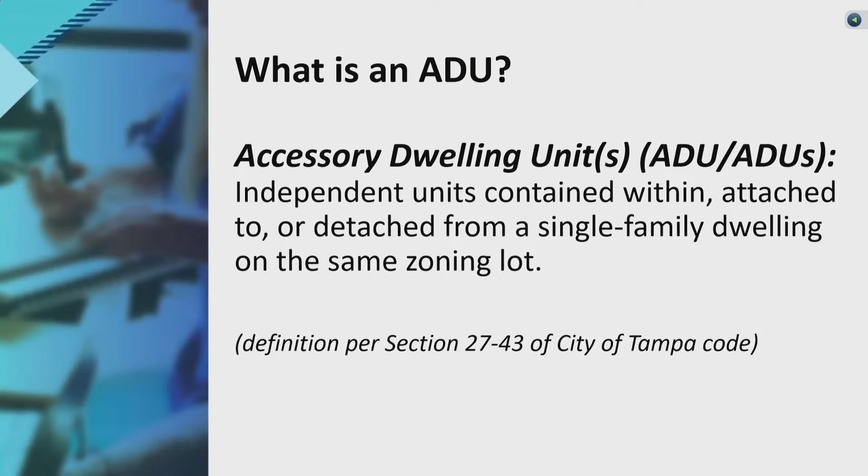So just a couple of definitions to get everyone on the same page. Definition of ADU - this is from the City of Tampa Code - it's independent units contained within, attached to, or detached from a single-family dwelling on the same zoning lot. Other definitions that may be pertinent to the discussion.

Extended family residence - I think you guys deal with this on a somewhat regular basis. So extended family residence, within a single family residence, is a living area designed to provide independence and privacy by allowing a separate bedroom, bathroom, dining area, and kitchen for an extended family member. There's a bunch of nuances within these categories, which I'll try to get into without making it too confusing.

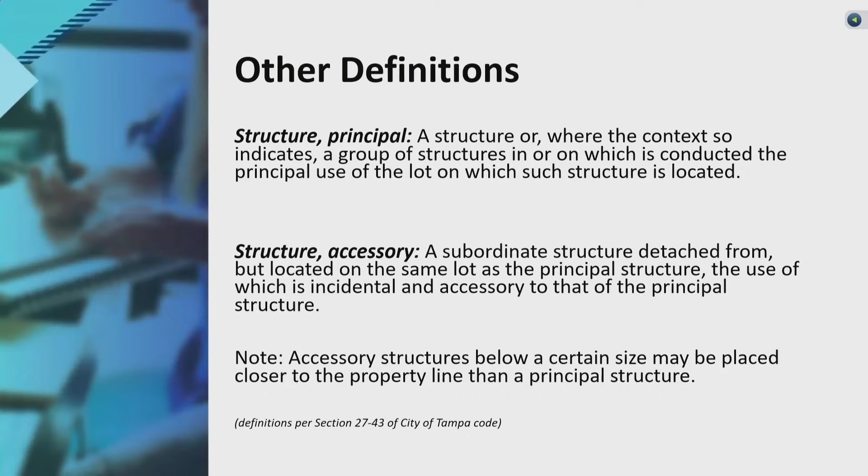As a quick timeline on ADUs, it's been a multi-year effort we've been working on throughout the city. The last big push started late last year and continued into this year, where we're basically doubling the area of the city where ADUs are allowed.

So we went through a long public outreach effort. We had 8 to 10 community meetings, and we went to the communities that expressed high interest in ADUs, so those are the areas we targeted.

The AARP actually has a really good packet on ADUs, and we have some in our planning office. If you guys want these, I can get them to you. It's just about the benefits of ADUs.

Now let's get into the overarching policies that guide ADUs. This is from the comp plan, land use policy 9.5.6. It encourages accessory dwelling units, stating they shall be permitted in future land use categories that allow residential development, subject to regulations designed to limit impacts and protect character.

So we get a lot of questions about what is and isn't an ADU. By right now, you could build a bonus room, a man cave, a she shed, whatever you want to call it, that has a separate bedroom and a separate bathroom with a toilet and shower. You could have a fancy wet bar with cabinets, a dishwasher, and a fridge. The only thing you can't have is a cooking appliance.

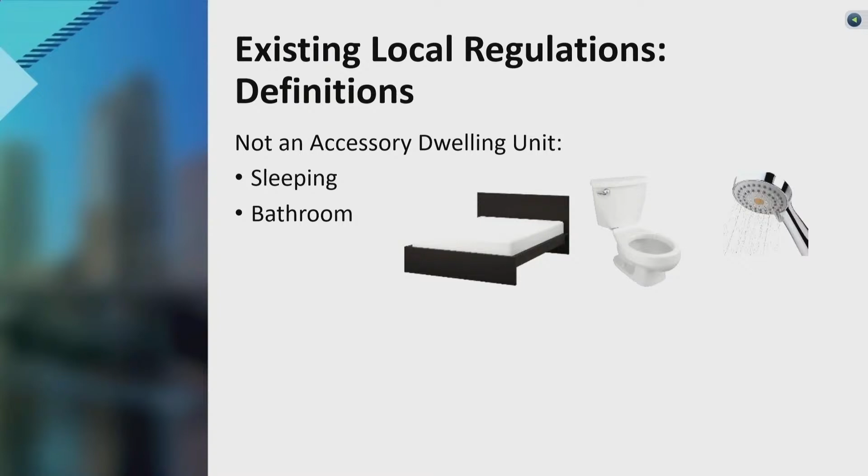This is what flips just a bonus room into an accessory dwelling unit: the introduction of a microwave, or something as simple as a hot plate, oven, or stove. That's how the city differentiates between just a room or extra living area versus a whole separate ADU, which may or may not be allowed depending where you are in the city.

We'll get into that, it may come back up here in a bit, but I'll continue with the rest of the presentation. So here are some different forms an ADU could take, going from left to right: conversion of a basement or garage, conversion of an existing structure. We have a lot of those in Seminole Heights and some of the older neighborhoods, people wanting to convert an old garage that's been there for 50 years into living space. They could also be a new ADU, detached or attached.

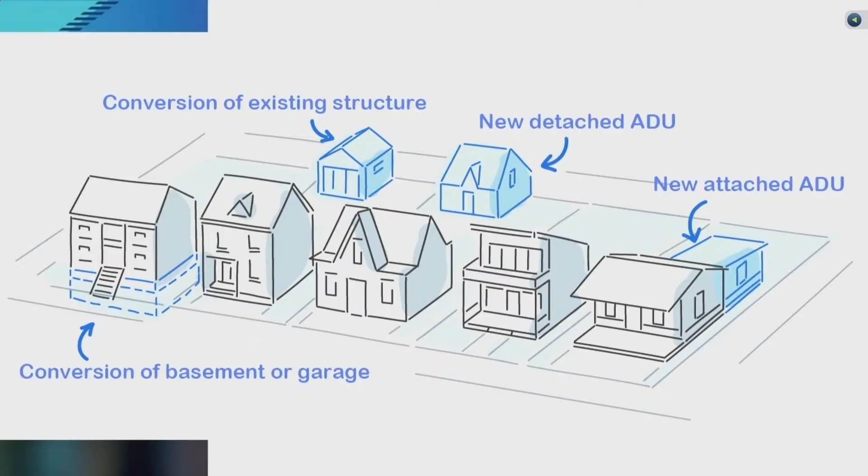So here are just some images, not necessarily from Tampa, but showing that form. Some of them are detached, some are above the garage.

Now we'll get into the regulations. This map is the important thing here. The area in red is the area, if council approves this Thursday at the first hearing, where ADUs would be expanded to the whole area allowed in red. So it's basically doubling the area throughout the city where ADUs are allowed. It's going to cover about 21% of the city land area.

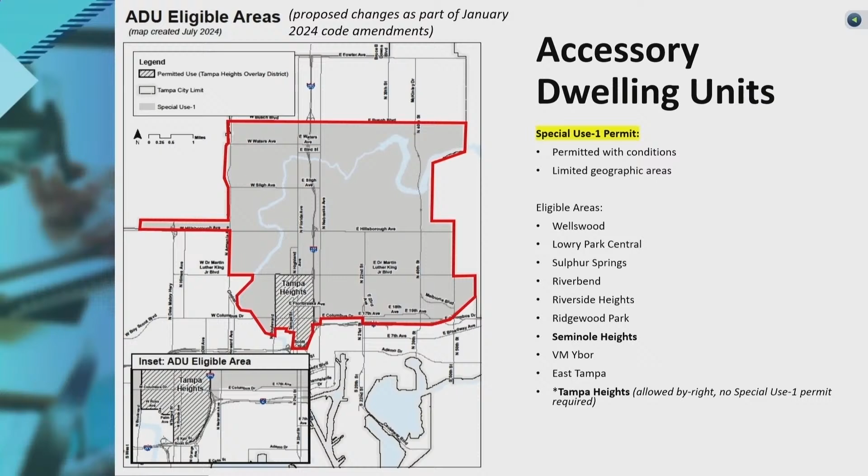It's roughly half. I don't have the before, but it's essentially the Seminole Heights area and East Tampa, and then we're expanding it a little bit out. So this Thursday is the first hearing, and the second hearing should be July or August, in which case this should become effective in this area.

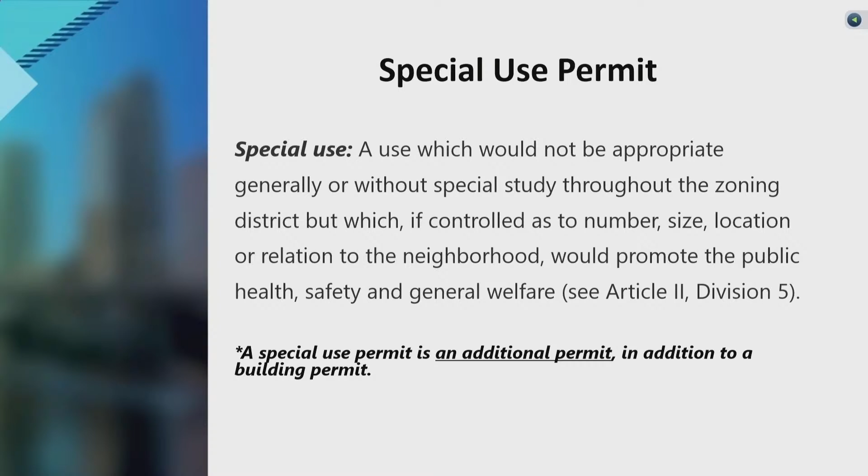The thing is, with ADUs, they require special use permits, which is an additional permit on top of a building permit. Well, let me just get into it here.

So these are the current regulations for ADUs. When someone wants an ADU, they have to apply to the zoning office for a special use permit, and these are the criteria staff uses to judge whether they could approve it. The max area is 950 square feet, and the main residence has to be owner-occupied, so right now the owner has to live in the main house. They cannot live in the ADU.

An accessory dwelling unit may not be located in a non-conforming accessory structure, or one made conforming as a result of a variance. We get a lot of those cases in Seminole Heights, people wanting to convert a non-conforming garage. Staff cannot approve it, so those cases usually get kicked to city council, and only city council right now could overturn staff's denial. Also, at no time may the number of occupants exceed two.

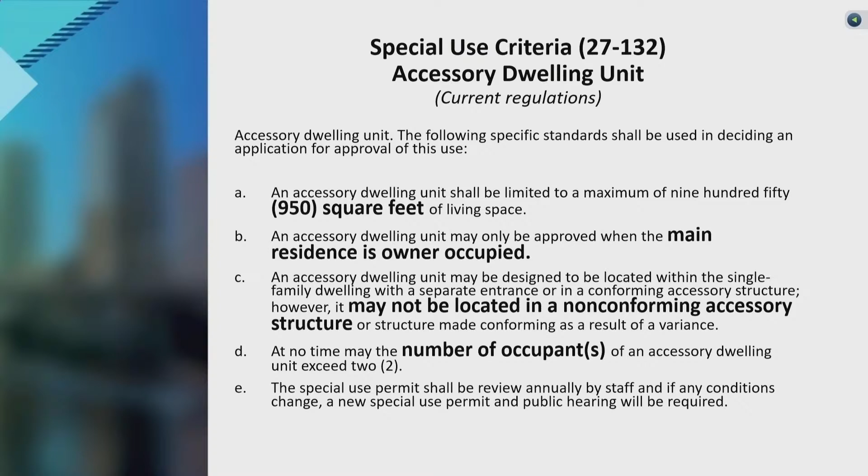These are the changes that are going to be part of this January 2024 cycle, which the first hearing will be on Thursday. We are changing the special use criteria.

If you look at letter B, we're going to propose that the main owner has to reside on the property. So they could live in the ADU and rent out the main house. We're getting a lot of those requests, someone that's downsizing, they don't need the whole house, they want to live in the ADU and travel half the year. Right now that's not allowed.

These changes would make that allowable. Also, we're going to give staff the authority to approve an ADU in a non-conforming structure, so they don't have to deny it. Someone could apply for a variance, and staff could approve it.

And then we're also allowing the number of unrelated occupants. So at no time—we're taking the total occupancy of 2 to saying no more than 2 unrelated. That allows for the third person. If there's a young couple and they have a small child, now they could legally stay in that ADU.

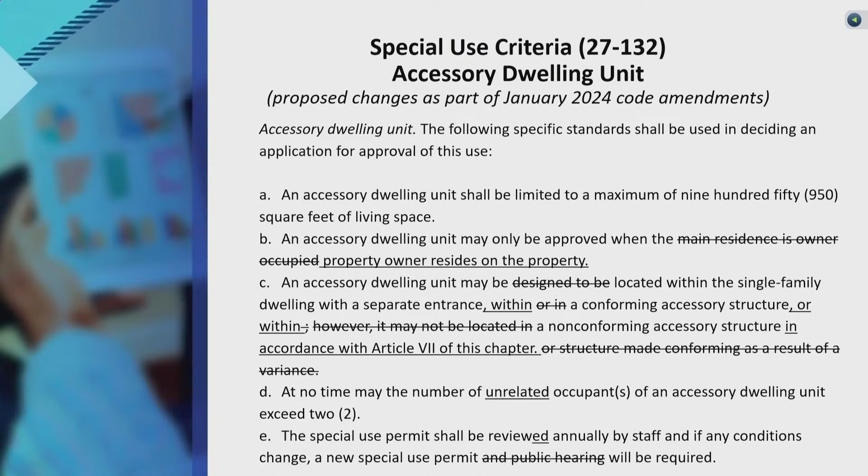Extended family residences are allowed citywide. They're essentially ADUs, allowed citywide, but there's some other restrictions. People that could live in there have to be part of the extended family, either by marriage, blood, adoption, or legal guardianship. So you can't rent to strangers or friends, it has to be for a family member.

And the other strange thing is that the occupant of the extended family residence may not pay rent. That's the way it is now. If you have your mother-in-law back there, you can't charge her rent.

All right, so the current dimensional regulations—this is from city code, generally applies citywide. Each area, Seminole Heights and Tampa Heights, is a little different. Even East Tampa, the setbacks are a little different. I'm not going to get into all that because it's going to get way too confusing, but that's a result of the code kind of being piecemealed over the years. We wanted to do an overarching citywide amendment, but that didn't go over so well, so we're doing it piecemeal, and as a result each neighborhood has its own kind of standard. But the general code generally applies through most of that ADU area.

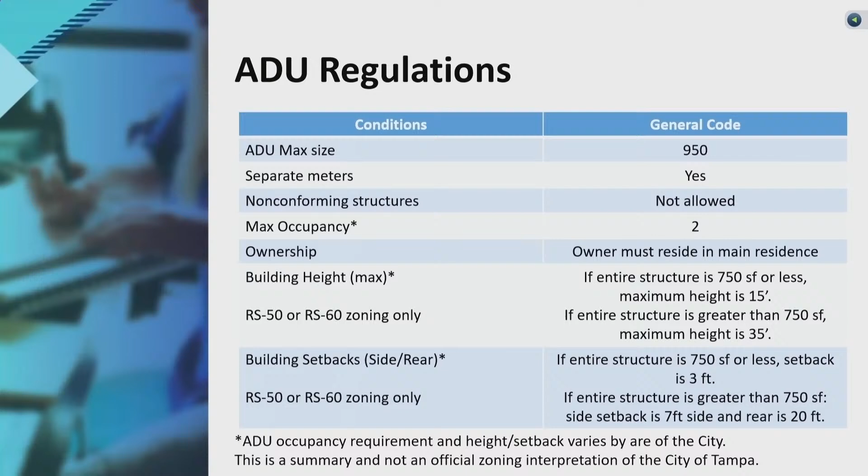I won't get into all the setbacks, I'll try to get through it here. As far as parking goes, right now it's one parking space per ADU, that's in the general code. Again, it's different in Tampa Heights—they have a little bit more, some parking relaxations, but I won't get into that. I could, if you guys have specific questions, I can get you those answers later.

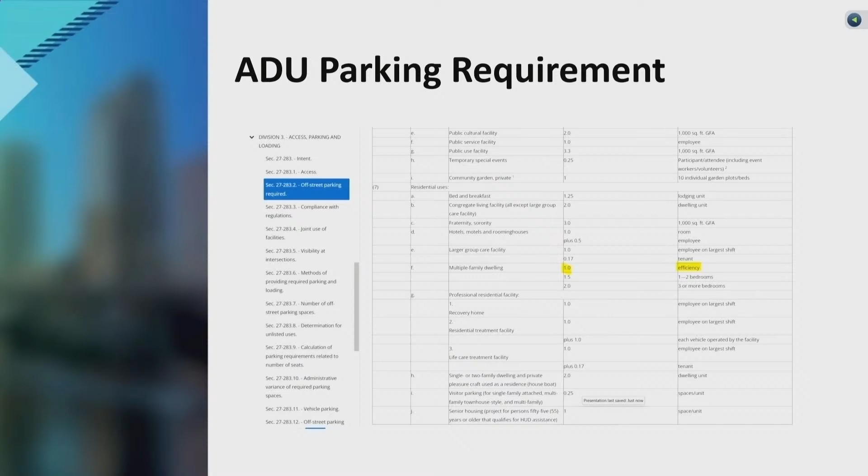Yeah, the key word there is that you know of and that have been permitted. Yes, of course. And that's kind of one of the drives of us trying to allow more ADUs, because every time we go out we hear, my neighbor's building this, converting their shed in their backyard. It happens. There are ways to address that, but I think it's also incumbent on us as planners to see what people are doing and then find a legal way to do it the right way, make sure the structures comply with building code, and that it's safe.

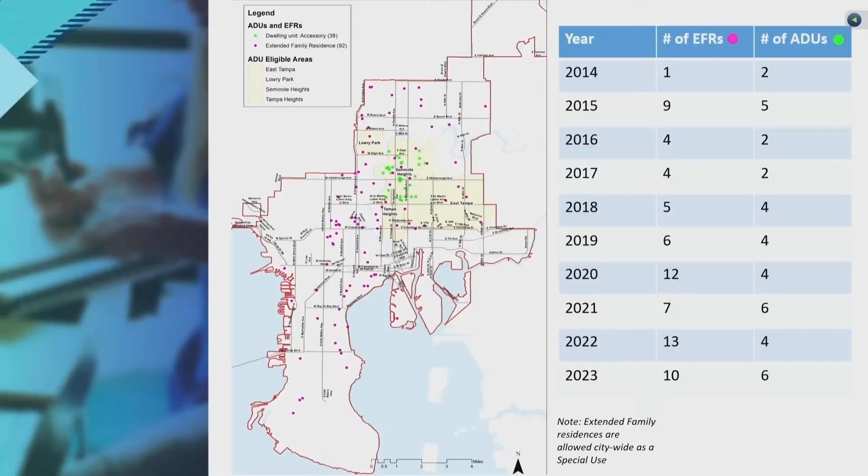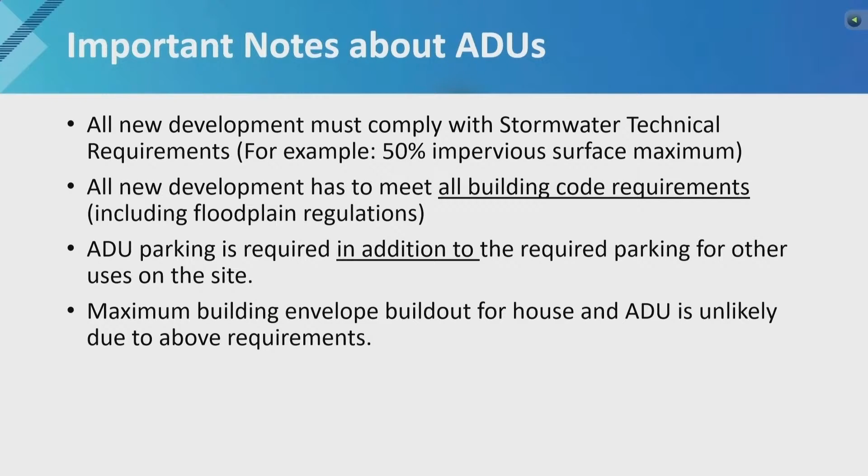All right, do you guys have any specific questions or comments?

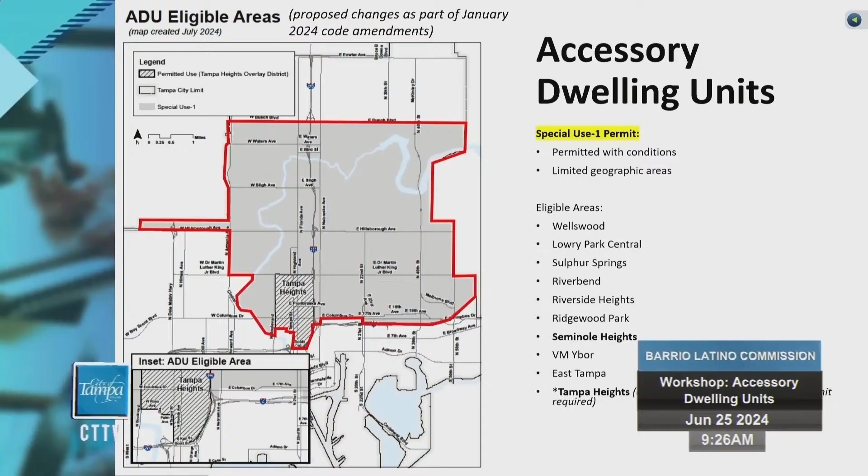Are you actually continuing to move through the different neighborhoods that this is impacting and bringing this forward to the citizens of each of those new expanded areas? Yeah, so if you look at the area in red on the screen, these were the neighborhoods that, when we did a citywide survey - a simple, do you support ADUs in your neighborhood, yes or no - we went to the neighborhoods that had 70% support or higher, and at least 70 responses, because we want to go to areas that were actually engaged with the survey and showed high support. There were some neighborhoods with a lot of engagement and a lot of no's, so we didn't go to those neighborhoods at this time. There was actually a lot of support within Ybor itself, but we didn't include it - it was getting too complicated with the historic district, trying to include that area as part of this code cycle. So we know there is support.

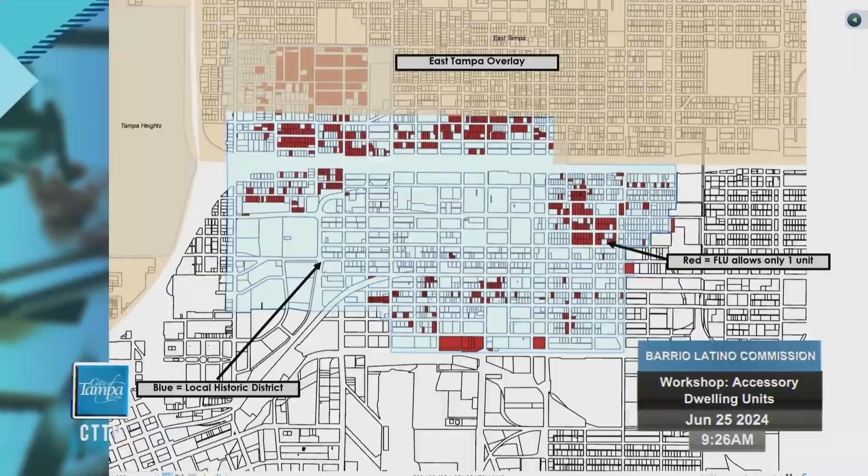The big thing is in Ybor, I just want to point this out - I don't know if it's in here. This was just a map I was using to clarify my thoughts, but I'll try to walk you through it. The light blue is the local historic district. Right now, YC zoning allows for a second, third, fourth unit - it's essentially multifamily zoning, so by right, most lots could accommodate a second unit. The red lots you see do not meet the minimum size requirements for a second unit, so it's not that many. That's why, if it meets the guidelines and you approve a second unit, that's kind of a de facto second unit or ADU that people can have. But we would still be interested if the board or neighborhood wants to explore ADUs in addition to what they already have.

I just want to clarify what you just stated. In viewing Ybor City specifically, since this is our purview, ADUs are not necessarily the term that we might hear. We might hear just an additional unit because by rights they have that. And they do not require a special use permit of any sort for that. That's correct, yep. Okay, thank you.

Yeah, and that's why it's kind of like if you made that an ADU, then you're kind of adding another process. But again, if it's something that the neighborhood would be interested in, we could certainly do that.

I know you might not have the answer to this one, but the parking. I know some houses that might not have parking, they have street parking. So if there's a house and they qualify for the ADU, are we gonna make them put in, or justify or figure out how they can get one more parking?

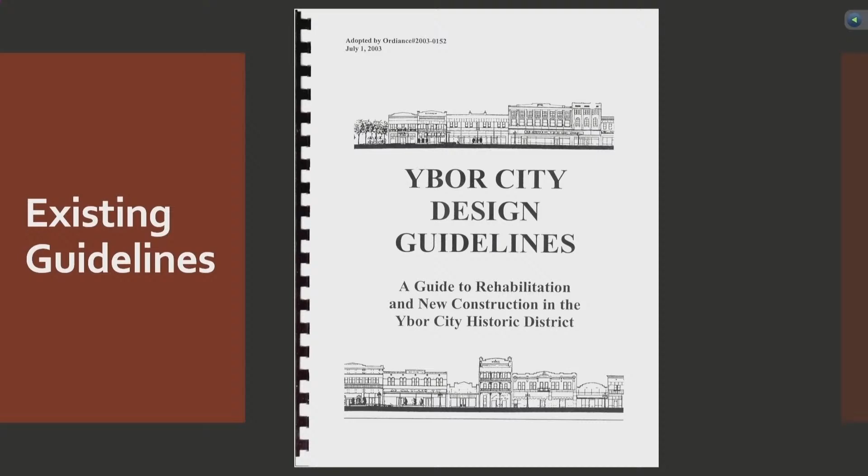And we've been working hard to create a set of modernized standards that'll be codified and adopted to assist owners and developers in meeting their project goals in a historically sensitive way. Provide specific measurements of success, address modern topics, be reformatted and better organized, conform to ADA fonts for equal accessibility, promote maintenance and encourage rehabilitation over new construction, and overall create a user-friendly document.

Our current preservation guidelines have been an effective and helpful broad how-to. However, we do use these as a review tool when evaluating projects going before the BLC, which can be challenging when categories are overly broad. A previous staff assessment of the existing guidelines found that there needs to be more emphasis on rehabilitation.

The code lacks the necessary references to the Secretary of Interior's standards, which are codified in our code as a review tool. The new construction section lacks depth. The overall document is not formatted in a method that is informative and instructional. And some illustrations lack details required to be of assistance and tend to be extreme as a comparison method. The advances in technology necessitate periodic updating—again, it's been over 20 years. And we've also added additional sections to address certain elements.

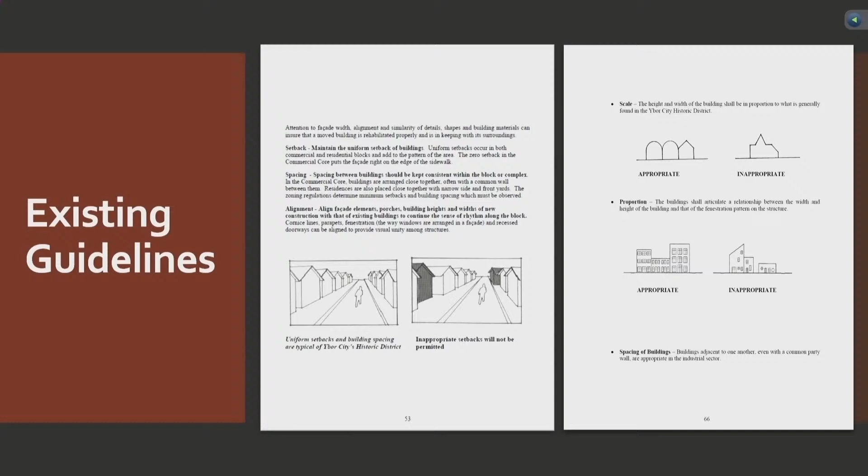So beyond just listening to you guys and your discussion, we've also had several other sources and inspiration, including the existing design guidelines. The Secretary of Interior standards is a big one. They were updated, I believe, in 2017. The preservation briefs, which are continuously put out by the National Park Service, and other cities' design guidelines.

And the state of Florida's model guidelines for design review. That's a very helpful tool. They actually have illustrations in there that different cities can use, so there's consistency across the city governments in Florida. And we're going to add some information about flood adaptation, which is an important subject here in Tampa, as well as all of Florida.

Here are some iterations, beginning with the existing standards to a preliminary draft where we engaged with the consultant a few years back, and then the current staff draft. So you can see where we're headed with this. We're trying to have a much cleaner and friendlier format that we use.

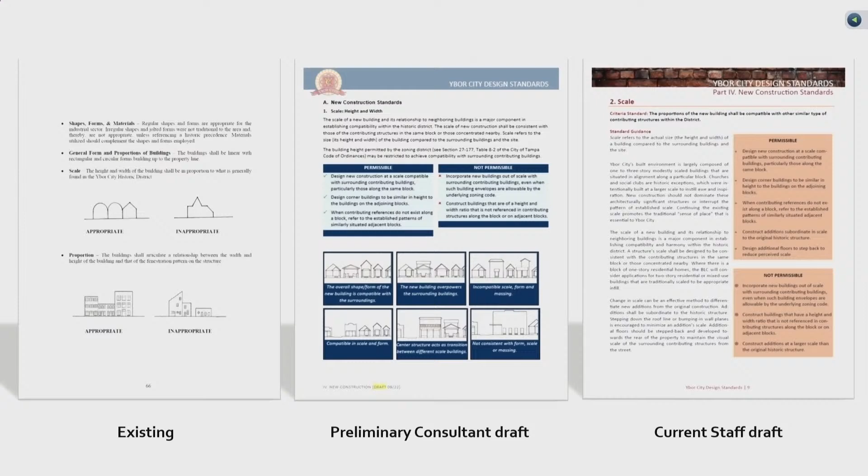The proposed draft components, we're trying to have a one-page sheet for each criteria, so it'll be helpful in pre-application meetings that we don't have to give them maybe a 100-page document, maybe just the certain sheets that pertain to their project. So each one will have the criteria labeled, the standard, which will have the word 'shall' in it, so it conveys its importance. That is the important sentence that we're going to be judging each project by, or how we're going to evaluate the project. Does it meet the standard for each of these criteria?

Any key terms that need to be addressed, some context, whether it's some historical background or why that criteria is important for the board to consider, the basic guidelines, and then having a summary of clear, permissible, and not permissible details for each project to be evaluated by.

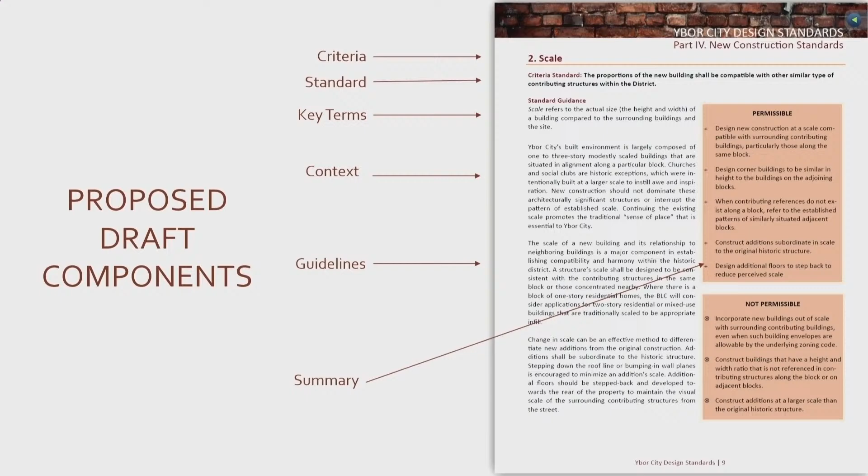And the back sheet's going to have some visual examples, whether we use diagrams, some photos, and I've even been playing with AI generator, so some of our images come from AI. Those are typically the non-permissible ones, because we don't want to shame anybody and use their property, so I'm using AI for the non-permissible.

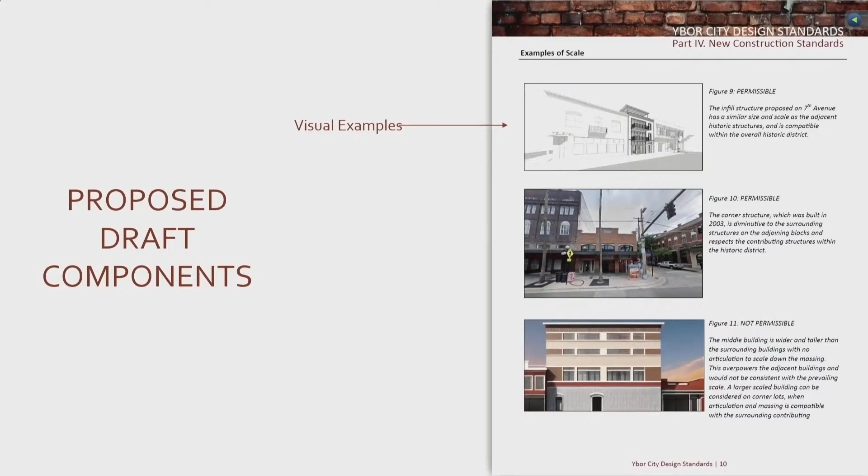Here are the basic 6 sections. Section 1 is going to be your standard introduction and general information that's just being updated. It's going to include the YC8 and YC9 zoning districts, which are not currently in the 2003 guidelines.

Section 2 is new, it's maintenance. Right now, maintenance and rehabilitation are one section. We're breaking maintenance off. We want people to be able to use these guidelines to maintain their home. That should be the first defense, and preservation is maintenance. So that's going to be a new section. I'm using some of those flood adaptations and some of the other preservation briefs that address basic home maintenance for the typical owner.

Rehabilitation, one of the most important chapters. I'm working on that one right now. We're going to be using some of the positive examples that have come before this board of successful rehabilitation projects, and we're going to be reforming that into the new format.

We've tackled new construction first. That is something you all see quite often, so we thought this is going to be one of the sections we needed to beef up the most. I think it is only 4 pages in the current draft, or in the existing standards. And right now, we've got it up to 57 pages. So really beefing up the new construction section.

The main thing that we want to emphasize is compatibility when it comes to new construction. All of our standards under the new construction section are going to tie back to, is it compatible with the district?

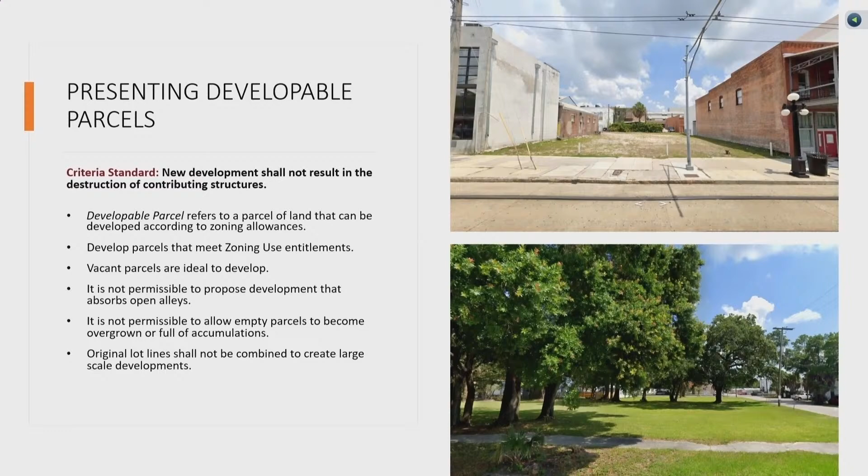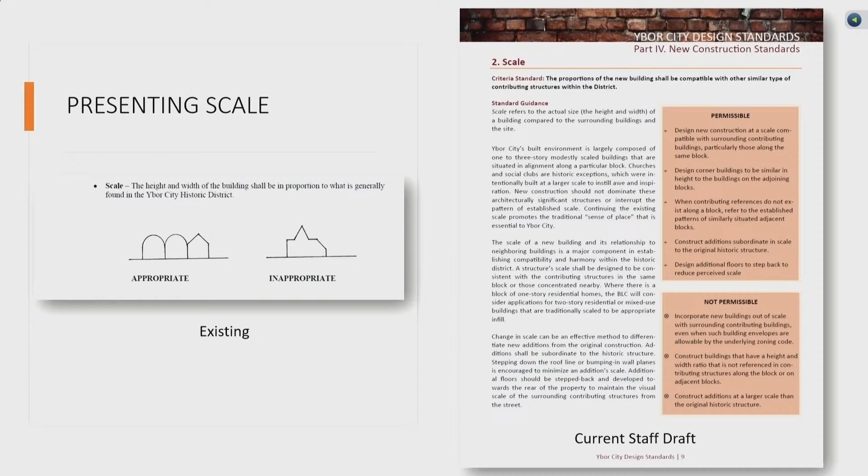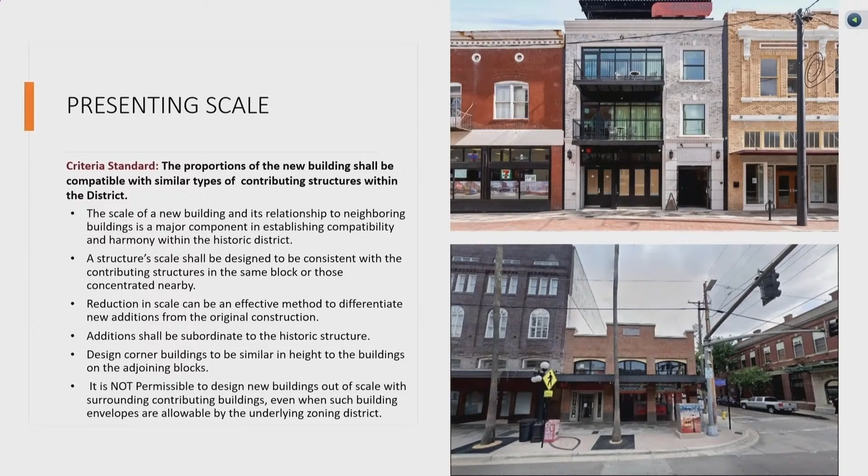Here's how scale is currently presented, and here is our current staff draft of what that page would look like. Scale is one of the most important criteria we considered in new construction. The scale of a new building and its relationship to the neighboring building is a major component in establishing compatibility and harmony within the district. So we really wanted that emphasized, especially in that standard.

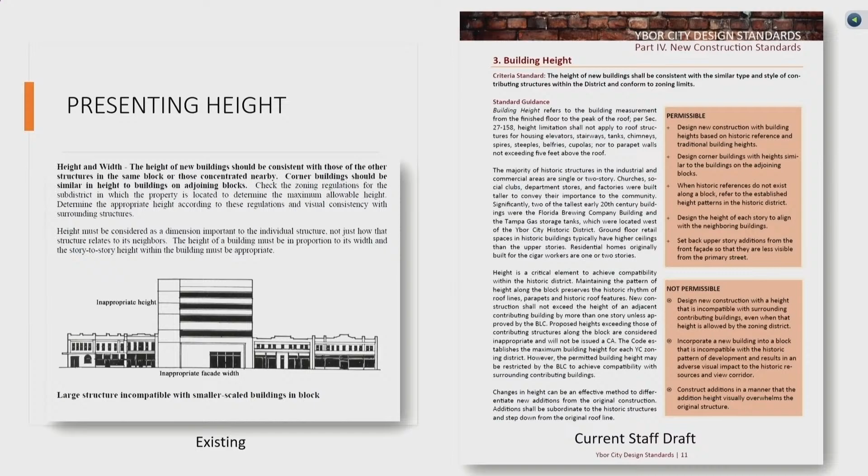Presenting height. Height is another important component when considering compatibility. Here's how it's currently presented and our draft. As with scale, height is one of the most important factors.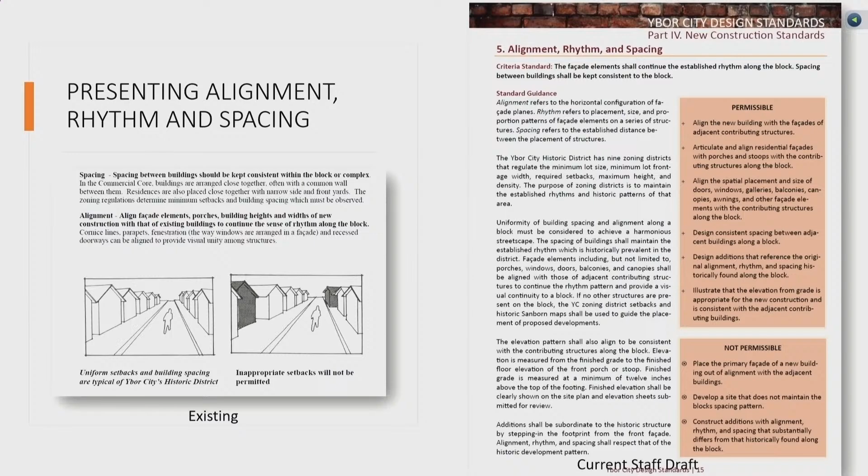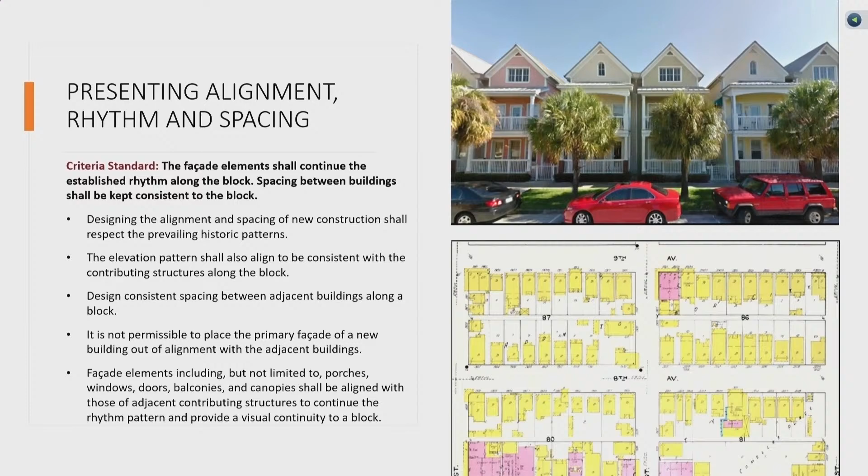Here's how building materials is addressed in the 2 iterations. Building materials for new construction is an important topic. We acknowledge that advances in material manufacturing continuously produce new building options. The BLC reviews substitute materials on individual cases to determine if the standards are met. Overall, any materials proposed shall be similar in design and appearance to historic materials found in the district. Vinyl and faux replicated materials are not permissible.

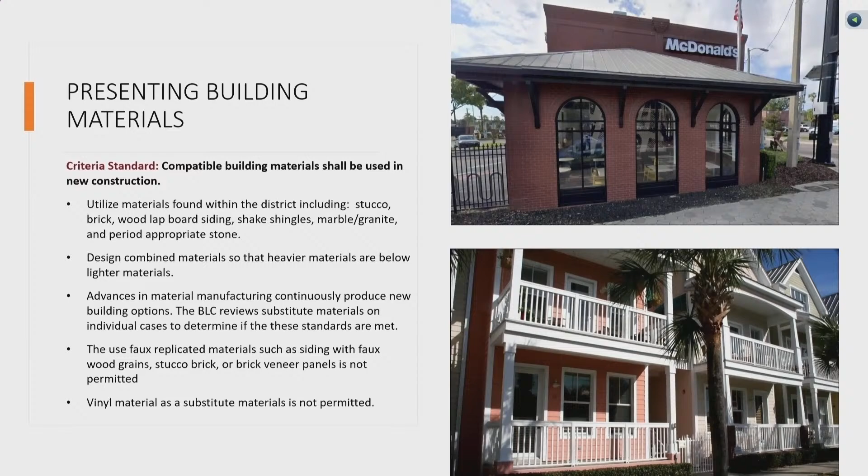Fenestration is always important in historic preservation, and the doors and windows shall be historically referenced and share the same insets, materials, proportions, and details as historic windows in the districts. Windows shall be appropriately trimmed with casings and sills. Doors with side lights and transom shall have the similar mullion treatments as the door.

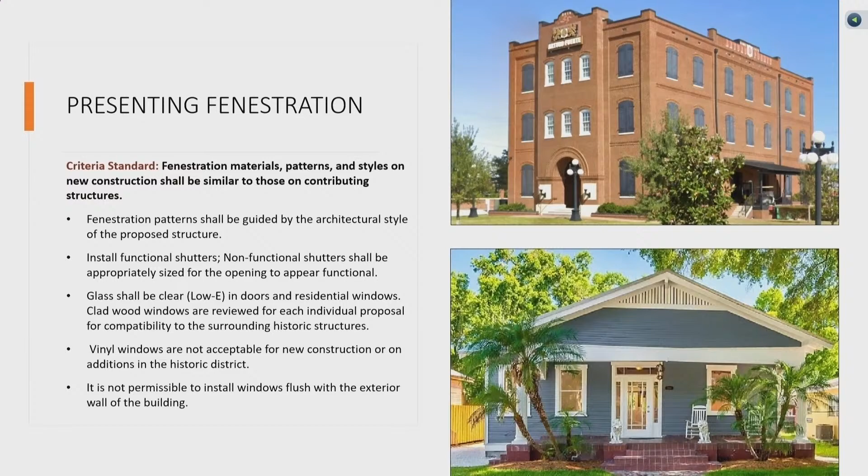Murals, another new subject that we're addressing in our new construction and in the general standards. There'll be 2 sections on murals. This is specific to new construction because new construction has a unique opportunity to address murals during planning.

And occupied roof structures. This is another common project proposal you all are seeing where they want to add rooftop additions to historic structures. So we're addressing that. Mainly it needs to be compatible with materials and buildings in the district.

And we've added some very specific numbers in here, and that will be in the guidelines when we send it to you. We'd like you to look over those numbers to see how you feel about how much roof percentage they should be able to occupy and how far back it needs to be depending on the height of the structure.

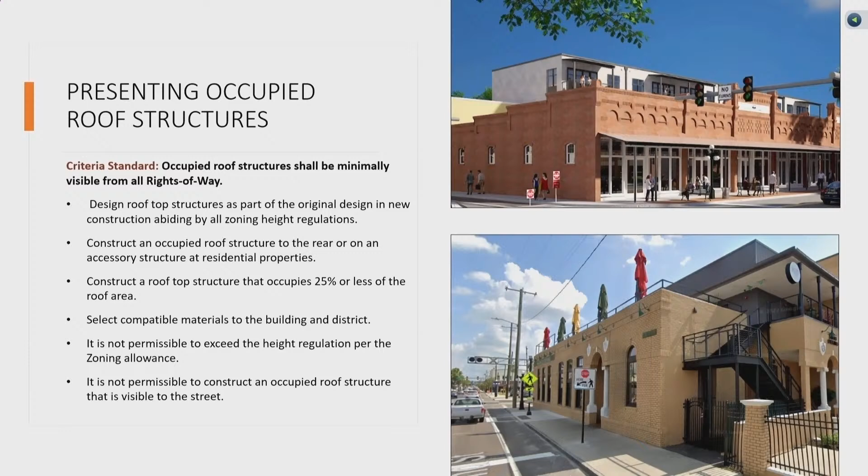And modern technology, this is something that probably needs to be continuously updated, such as solar panels, AC, HVAC units, mainly having it shielded, especially during new construction. That's something that should be addressed on all of the plans coming before you. How are these items being shielded and not affecting the historic character of the district?

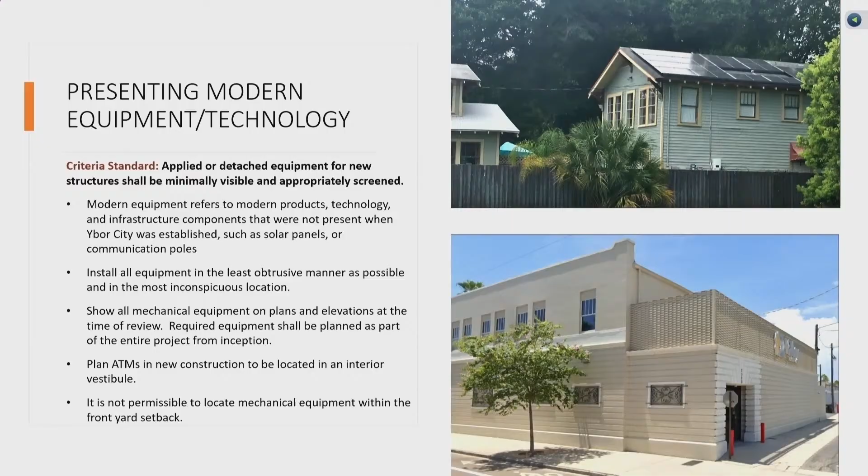As I mentioned, the importance of the standards, we're having very specific standards for each of the criteria. This is what staff will be using moving forward when we adopt these standards, to make sure that when we evaluate them, does the standard meet the criteria? So that's going to be the beef of these new updated standards that we really want you all to reflect on and perhaps give us your notes, if you have any, to make sure that we're conveying what should be evaluated.

Overall, new construction needs to be compatible, appropriate, and referenced.

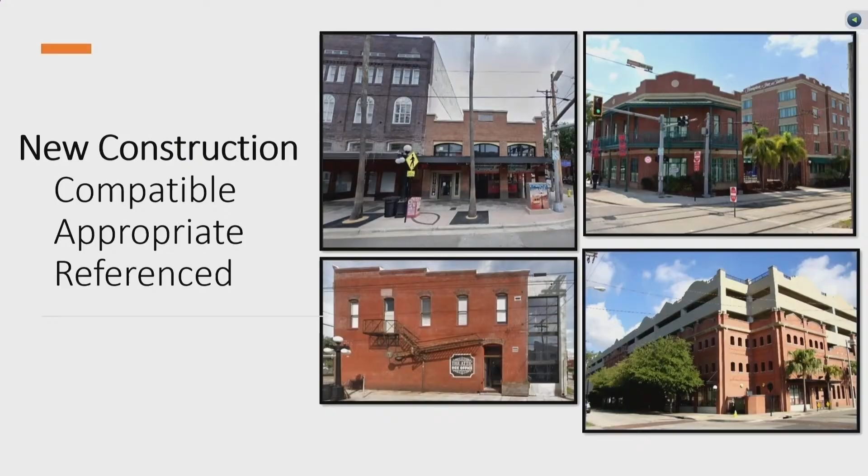Back on to section 5, which is site elements. That's what we're working on right now and completing this draft. Those are all those additional components of a site: sidewalk furniture, menu boards, even your sidewalks and driveways. So that's going to encompass all the more or less non-historic items to the site.

And then the last section is your standard references and resources. We'd also perhaps propose adding to the staff report a guide sheet, so when we evaluate, we can say right away consistent or inconsistent with that standard. That's something that we could provide to all of the applicants so that it is very clear and transparent about what we are evaluating each project on.

You have new construction coming forward. Does it meet the standard of each? So staff will use the same set of criteria, and hopefully that will reduce any projects getting denied in the future. Like everybody has the same set of standards that we're evaluating everything by.

Other worksheets will be included in the overall guidelines for project planning, including a matrix showing whether a project is administratively reviewed or board reviewed, with basic timelines. Giving people more transparency is the main part of these guidelines. We really want this to be a usable document.

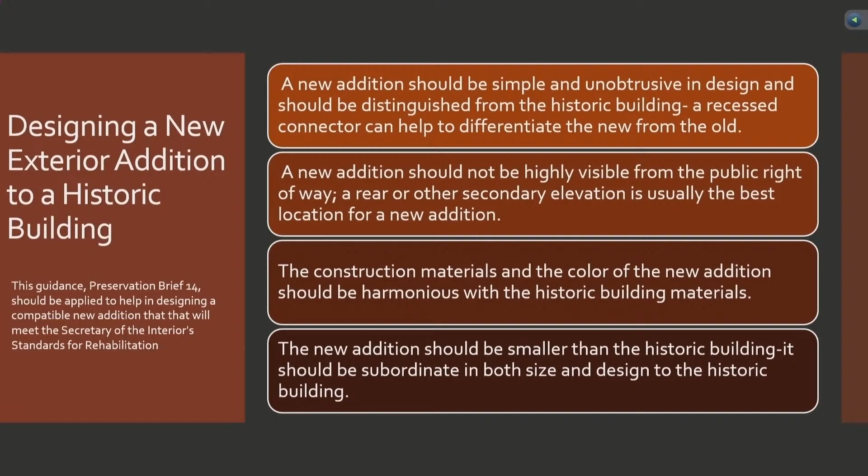This is directly from the preservation brief. These are the standards broken down into how to make a project appropriate, and they're the heart of compatibility. These examples are from Preservation Brief 14. They show additions properly delineated by a setback or a step-in, but using similar materials, articulation, and proportions so as not to be obtrusive to the original structure. That's an important word throughout the preservation brief.

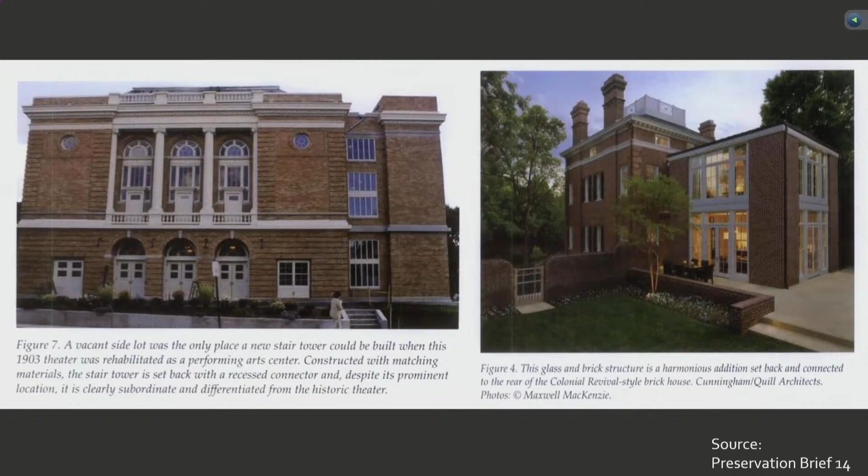Here's how our standards have been applied for new additions. Again you see there's a step back. The addition is the more plain brick building. It's not obtrusive, it does not take away from the historic structure. It's connected through a hyphen. The roof line is lower. So that's an appropriate addition.

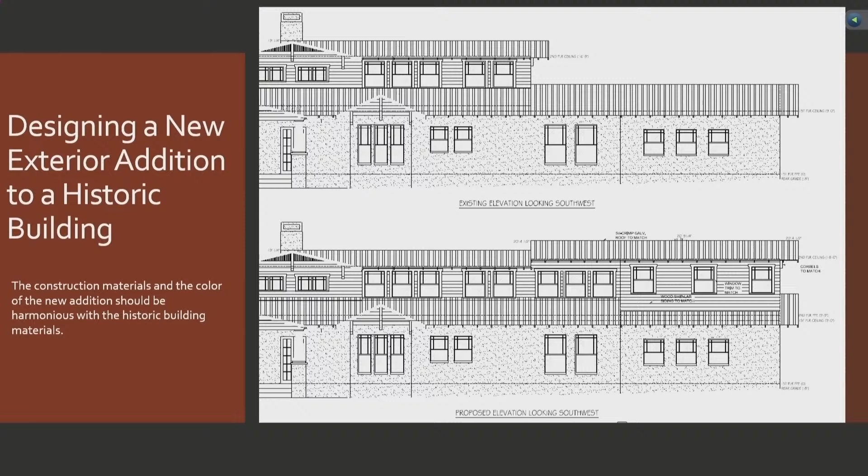And these address rooftop additions, specifically in Preservation Brief 14. Mainly it's about the sightline—how much can you see it, how much does it distract from the historic district. The preservation brief states that sightline mock-ups are essential to evaluate the impact of proposed rooftop additions to historic buildings. So that's something we should be looking for when proposals come in for rooftop additions, that they provide a sightline plan.

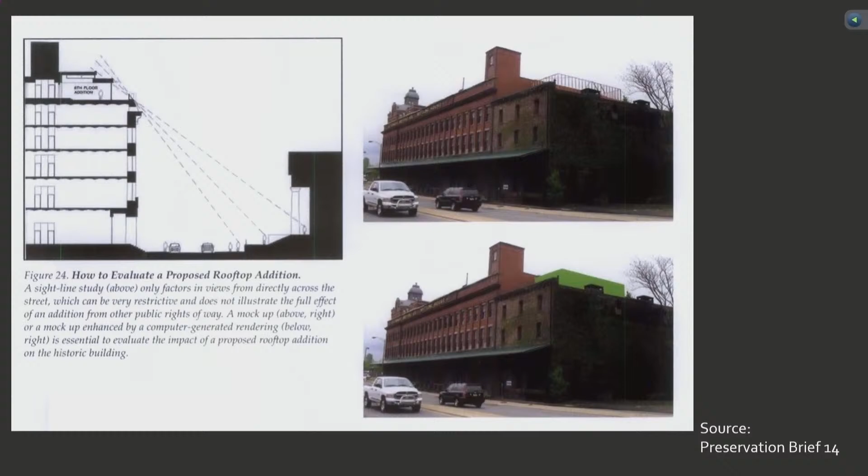Here are our design standards, and here are those specific numbers I discussed earlier.

For the roof height, if it's 35 feet or less, because it's lower and more visible, we would say it needs to be set back at least 25 feet. As it gets higher, we reduce that, because obviously as it gets higher, the visual impact is lessened.

And I believe we also have somewhere in there that a rooftop structure can occupy 25% or less of the roof area. So those are some of the specific numbers we are suggesting, and we're open for discussion.

Does that also address mechanical equipment that's on the roof? This one doesn't specifically address mechanical. We have a separate section for that, which does address shielding, but it doesn't give those specific dimensions for rooftop mechanicals.

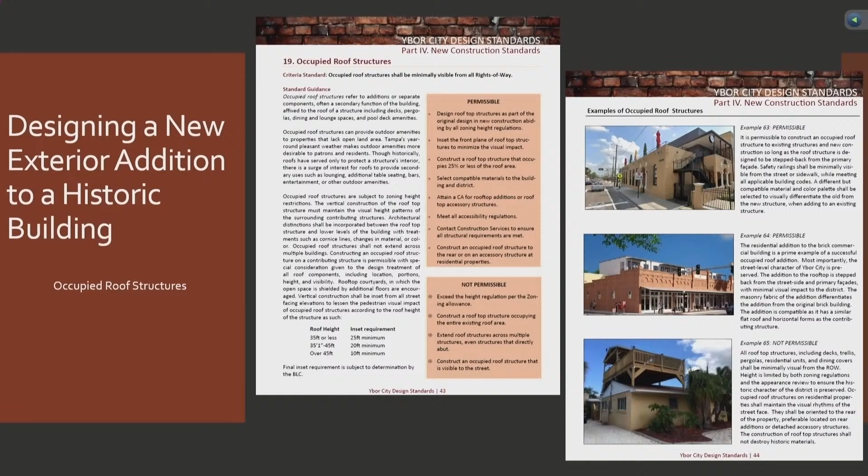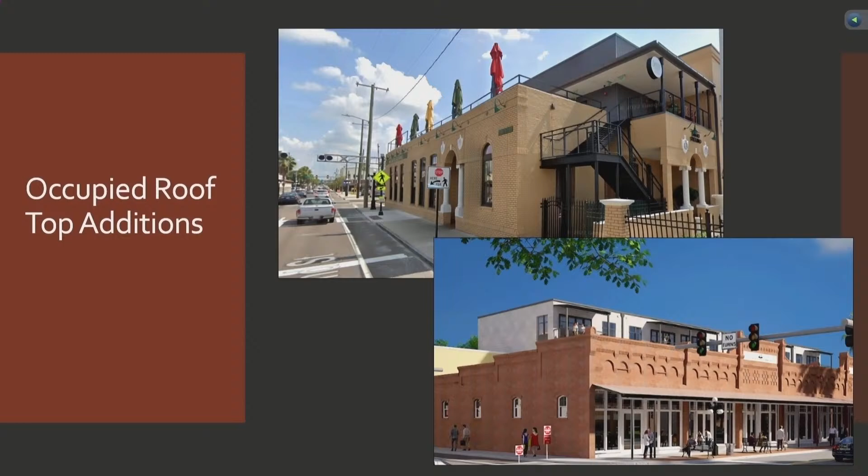Here are two local examples. One here is the restaurant up top, and they've scooted their staircase back. They did use a different material. Again, it's inset, pushed back. It's delineated, but not obtrusive. Same with the residential example, where they've added some residences to the top of a commercial structure in Ybor.

For the rooftop, the two examples you showed, the restaurant and the one with residences above, those look like they occupy more than 25% of the roof. So I was just curious how you got to that number.

That was from studying the preservation briefs and other cities. That's one of the numbers they found to be successful. Obviously it's case by case, so it could be a very large roof, and if it's a long linear building set back enough, maybe they could occupy 40-50%. It's just a general number to get us started. Okay, great, thank you.

Now, those setbacks from the front facade in the guidelines, I recall seeing that it said visibility from a public right-of-way. Now, sometimes the rear buildings are on a side street or the next street over, but it's still a public right-of-way. So how would we be expected to respond to that?